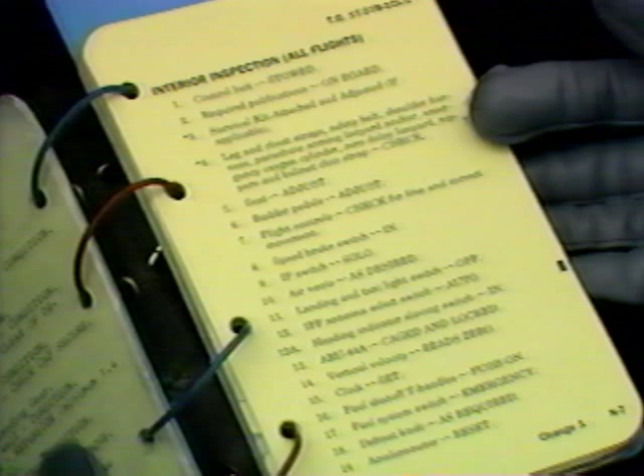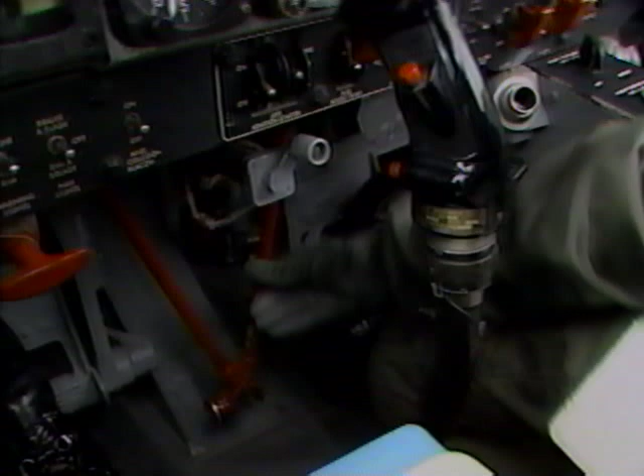This program will take you through the interior inspection, explaining how to accomplish the checks listed in your T-37 checklist. After you complete the exterior inspection, go ahead and strap in as you were taught in aviation physiology. Then get your checklist out so you can refer directly to it as you complete the check. The first item is control lock stowed. Swing it down and stow it as shown here. Make certain the control lock pin is secure in the locking bracket.

Next, you should ensure you brought the required pubs for your flight on board the aircraft. They should be stowed in the map compartment in the center console. Lock the door after checking them.

The third item directs you to check your survival kit. This is not normally used at pilot training bases, but if it is, the Dash 1 warns that it be connected to the parachute harness prior to fastening the lap belt, and the straps be routed under and not over or through the lap belt. Failure to properly route or tighten the straps could result in injury or seat-man-chute entanglement during ejection sequence.

A more commonly used survival kit is the PSK, Personal Survival Kit. When using a PSK, ensure that it is attached correctly prior to strapping in your parachute.

The next item directs you to check your leg and chest straps, safety belt, and shoulder harness to be sure you're strapped in properly, with zero delay and gold key connected. Your zippers should be closed, and make sure the emergency oxygen cylinder is connected. Check that your helmet chin strap is fastened and adjusted to snug fit under your chin.

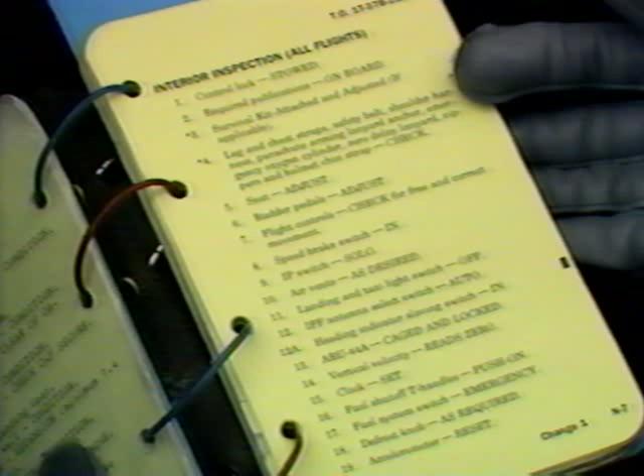Challenge your IP to also check these items listed in Step 4 of the checklist. Many IPs prefer that you wait until the battery is on to accomplish the challenge and response items, so you can use the interphone to talk.

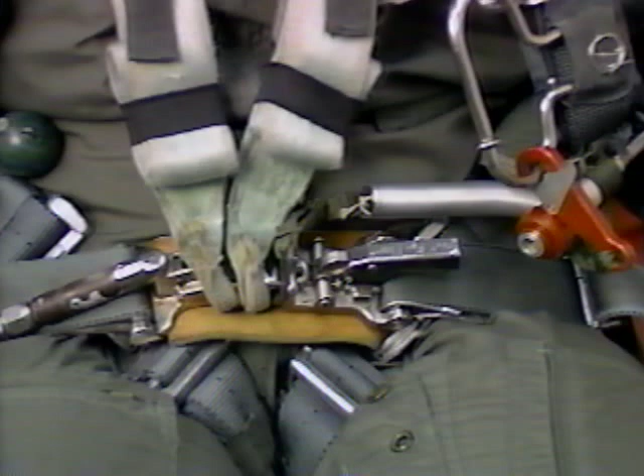At this point, there is a warning we need to address. Improper routing of personal leads may cause inadvertent opening of the safety belt latch during ejection. To permit clean separation from the seat during ejection, the parachute arming lanyard, commonly referred to as the gold key, must be outside the parachute harness and not caught on any equipment.

Also, you should connect, release, and reconnect the safety belt to ensure proper operation. Now check for positive locking of the belt by pulling up on the silver portion of the manual release handle without depressing the black portion of the handle.

Now you're ready to check for proper seat adjustment. Each time you fly, your position in the aircraft should be the same. Your instructor will give you references you can use to adjust your seat to the same height for each flight.

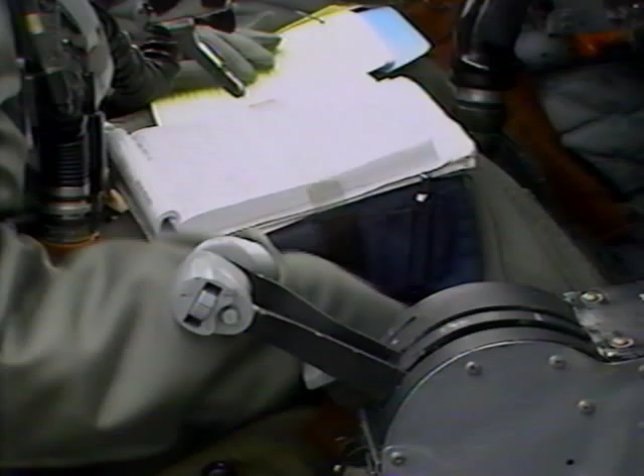To adjust the seat, first ensure that the hand grip safety pin is installed. Then check that the area underneath the seat is clear of obstructions. If an object was left under a hand grip, inadvertent movement could result when the seat is lowered.

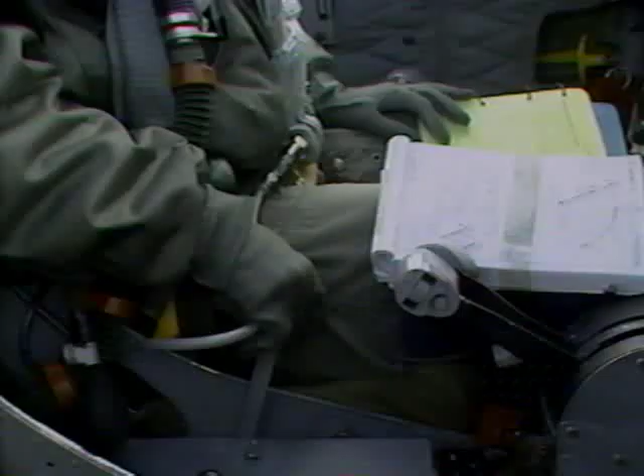To actually adjust the seat, lift up on this lever and allow the seat to move up and down on the rails by putting more or less weight on the seat. Use your legs to support your body weight in the seat, and then lower the lever when you're in the proper position.

Here's another warning. After adjusting the seat to the proper height, check that the seat catches are engaged. If the seat is not locked, G-loads in flight may cause it to move or prevent a safe ejection. Jiggle your seat up and down while simultaneously holding down on the adjustment lever to assure yourself it is locked in position. Next, adjust the rudder pedals.

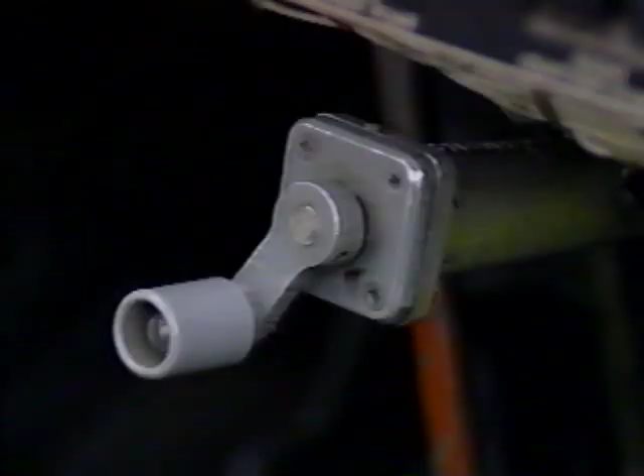When you rotate the rudder pedal crank, it causes the pedals to move closer or further away depending on which way you crank it. The rudder pedals should be in a position that will allow full rudder travel without having to completely extend your leg. With full rudder pedal travel, you should have a slight bend in your leg.

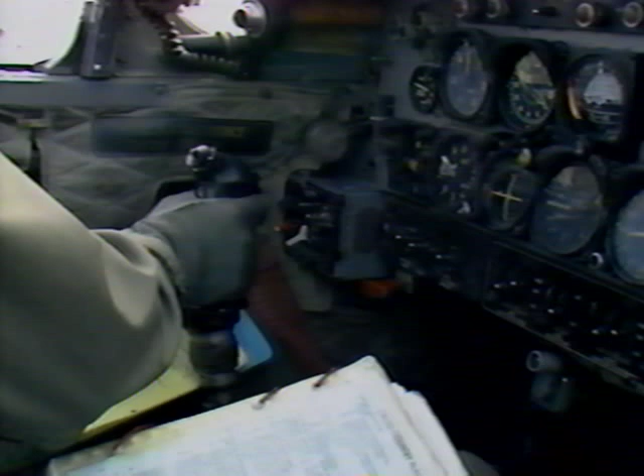Next, you'll check the flight controls. Be careful as you check the flight controls for free and proper movement, or you could bang the IP's knee with the stick. So before you begin moving the stick around, advise your instructor to keep their knees clear.

Push the stick to the left and check the left aileron. It should be up. Then check the right aileron. It should be down. Push the stick to the right. Check the right aileron. It should be up. The left aileron should be down.

Now pull the stick back and look over your left shoulder. The trailing edge of the horizontal stabilizer should come up with the control stick pulled back. If you can't see the trailing edge, check the position of the elevator horn on the outside of the horizontal stabilizer. It should be down. Finally, push the stick forward. The trailing edge should go down.

Next, while you're still looking back, check the rudder. Push the left rudder pedal. The trailing edge of the rudder will move toward your left. Push the right rudder pedal, and you will get the opposite effect on the rudder. Remember, it is extremely important to check the flight controls completely and thoroughly each time you fly.

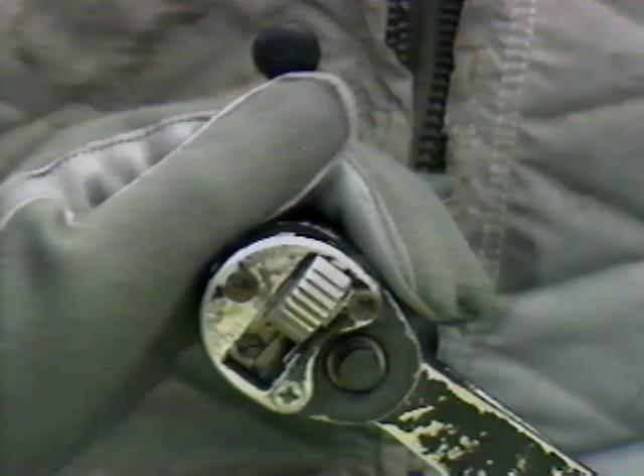Moving along in the checklist, the speed brake switch is next. Your speed brake switch should be in the in position for all ground operations. Next, check the IP speed brake. Reach over and check that it's in the solo position. This is a 3-position switch, and the solo position is in the center. With the IP switch in this position, you control the speed brake with the switch on your throttle.

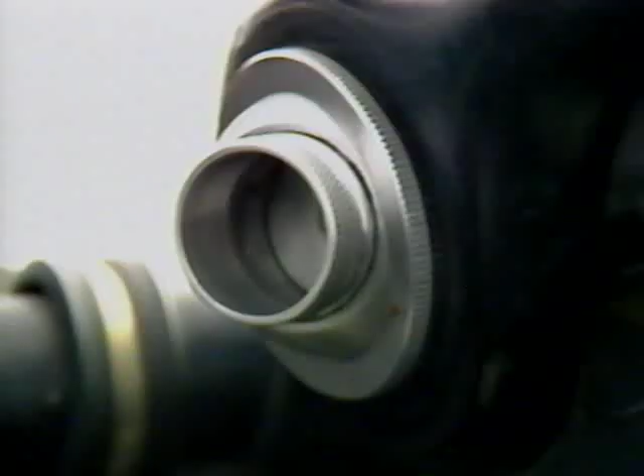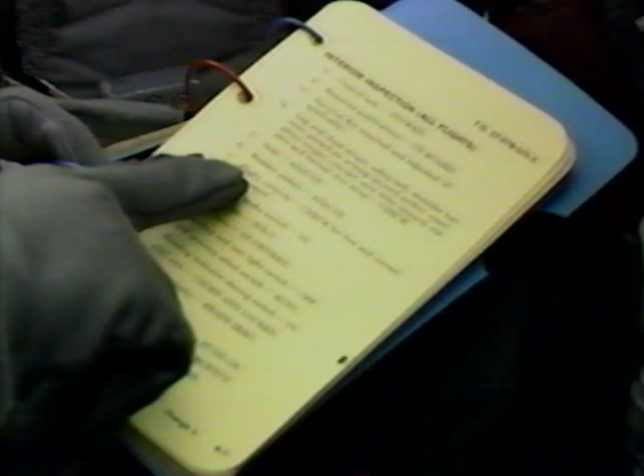Next, you will adjust 2 air vents. Just turn them to control the amount of airflow. Normally direct the vents at yourself for maximum comfort. However, during times of high humidity, you might get a stream of water blown on you. For those of you that like to accomplish several items at a time, this is a good point to stop and reference your checklist for accuracy. The next few items of your checklist take you across the instrument panel from left to right.

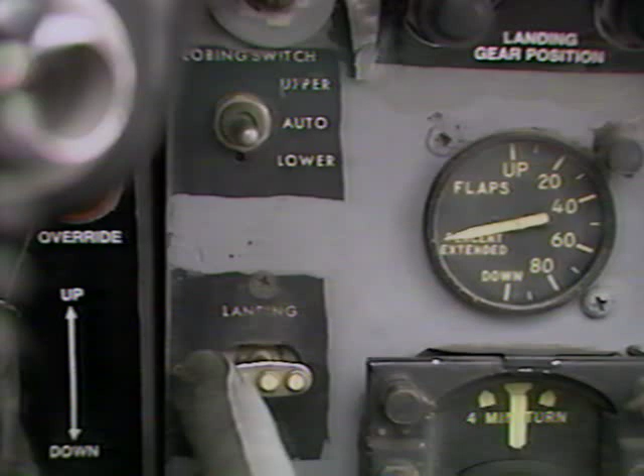Check the landing and taxi light switch off. The IFF antenna should be in the auto position. Just above the RMI is the heading indicator slaving switch. It has 3 positions: out, in, and fast. Check that it is in the in position. Ensure the ARU-44A attitude indicator is caged and locked.

Then come down to the vertical velocity indicator. Check that the VVI reads 0. If it doesn't, gently tap on the instrument to be sure it is not stuck. Set and wind the clock. Be careful not to overwind it.

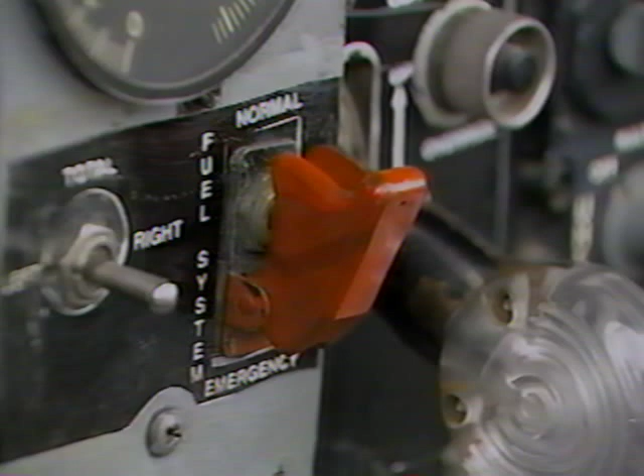Next, your checklist directs you to give a firm push on the fuel shutoff T-handles to ensure they are not pulled out. When they are in the out position, they are only out about half an inch, so it may be difficult to detect visually. The fuel system switch can be placed in emergency position by pulling the red guard away from the toggle switch and pushing down on the switch.

Next, check that the defrost knob is all the way in if you won't be needing it. To reset the accelerometer, just push the reset button in the lower left corner and it will return your accelerometer needle to 1G. Now check that the IFF, UHF, VOR, ILS, and DME are all off.

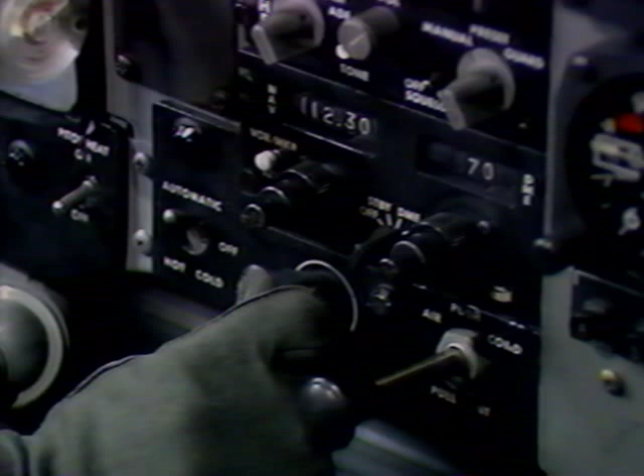There are 3 things you need to do with the air conditioner at this point. Pull the air lever out to vent position. Place the air temperature control switch to automatic, and finally set the temperature control rheostat as desired for your comfort.

Next, check the circuit breakers. From your position, there are several circuit breakers hidden by the airspeed and turn and slip indicators. You will need to reach over and physically confirm that these circuit breakers are in. The ARU-42A attitude indicator should be caged and locked.

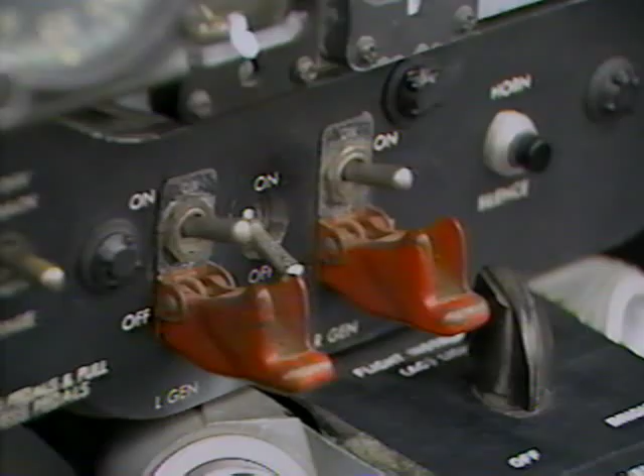Moving along to the next few items in the checklist, check the fuel boost pump switch off, the inverter switch off, and the generator switches on and the red switch guard closed. The pitot heat switch is next. It should be turned off.

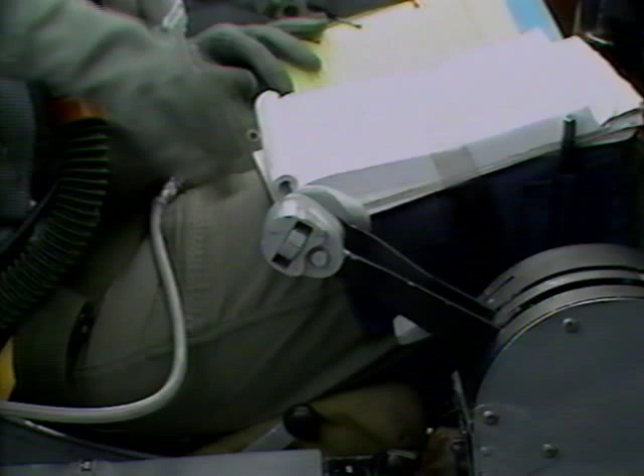Another warning that needs to be mentioned is that failure to accomplish this step can result in severe burns to the crew chief. Next on the checklist is check the throttles in cutoff. As a technique, lift up and pull back on your throttles to ensure they are in the cutoff position.

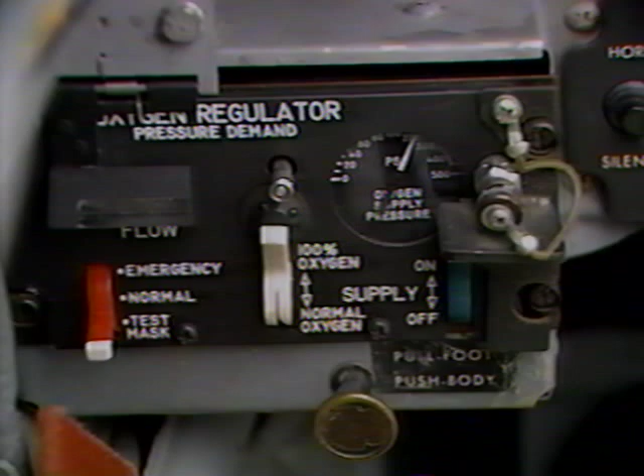Now you are ready to complete your oxygen system PRICE check. Hook up your mask and perform a pressure check on the oxygen regulator. First, you should select 100% oxygen with the diluter lever and place the emergency lever to the emergency position. Take a deep breath and hold it.

Then determine if there are any leaks in the mask or oxygen system. If your mask doesn't fit properly or is not tight enough, you'll feel oxygen escaping from around the edges. The blinker on the oxygen regulator will indicate if there is a flow. If you are holding your breath, it should not indicate any flow at all.

Now return the emergency lever to the normal setting and exhale to check the exhalation valve in your mask. Finally, with the diluter lever still in the 100% position, take a few short breaths and check the blinker for normal operation. Return the diluter lever to the normal position. Remember, the oxygen system check is a challenge and response item, so challenge your instructor.

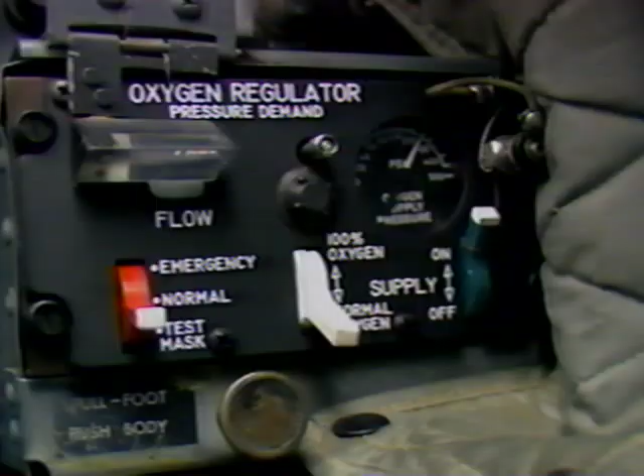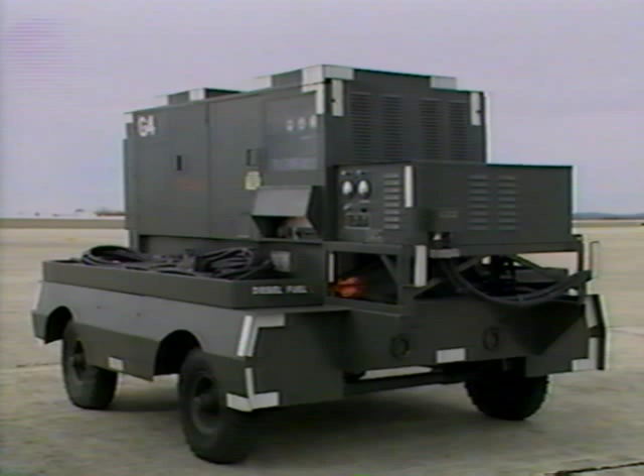Next, you will set up the interphone panel. Normally, the rotary switch is in the COM inner position with all the toggle switches outboard. Now you're ready to apply electrical power to the aircraft. Normally, your battery will provide sufficient power and should be placed on at this point if the APU is not used. If auxiliary power is used, the battery switch must be turned off or damage to the battery will result.

Moving on in the checklist, the pitot heat will be checked in coordination with the crew chief. This is accomplished by turning the pitot heat switch to the on position while the crew chief checks the heating system. They'll check the pitot tube and transducer vane on the left wing. When you receive a confirmation that the system checks OK, return the switch to the off position.

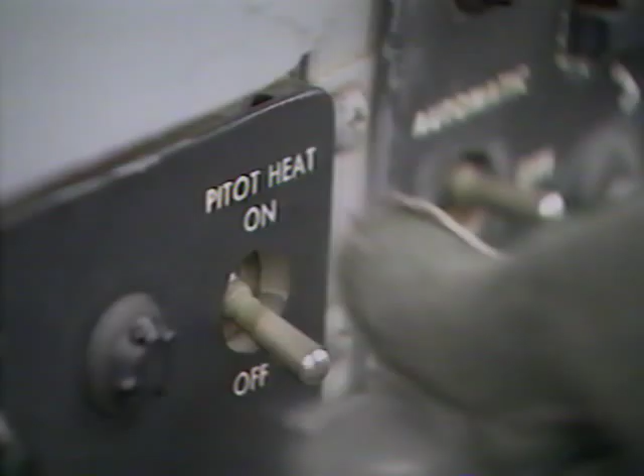The next item of your checklist directs you to check the inverter. Check that the main and spare inverters are working by first turning on the spare inverter and then the main. You can hear the spare inverter when it comes on, however you won't be able to hear the main. A later step in the checklist will require the inverter to be on for at least 1 minute. As a technique, hack the clock at this point in your interior checks. As a technique, look for movement in the fuel quantity gauge to confirm AC power is available. It may take 5 to 10 seconds before the pointer begins to move.

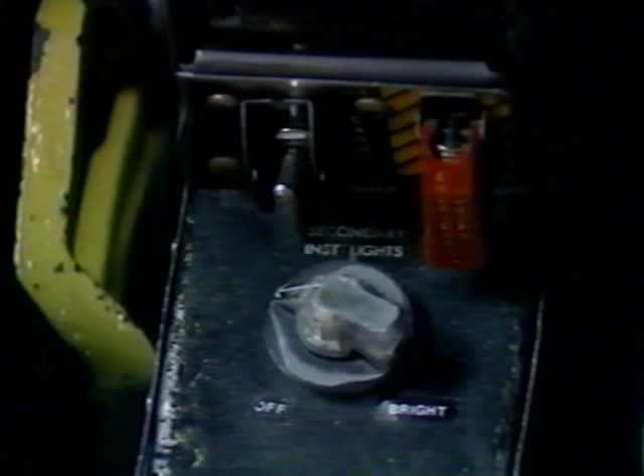The next item in the checklist directs you to set the interior lights as required. In the daytime, you normally don't use the interior lights, so turn them off. This is the radio lights rheostat. These two rheostats located on the center console control lighting for your primary instruments. The last rheostat is located on the rear portion of the center console and controls the intensity of floodlights located underneath the glare shield. Two lights that are often overlooked are the map lights. Be sure that yours is off and ask your instructor to check that theirs is off too.

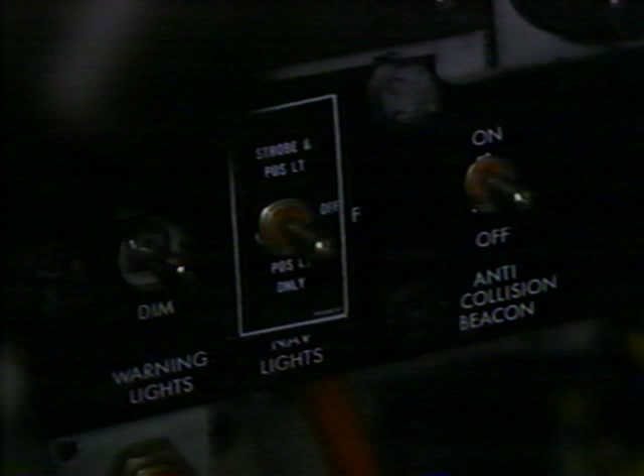Next, check the emergency canopy control switch. Located on the center console, it is safety wired closed. The next checklist item concerns the exterior lights. Prior to starting the engines, the position light switch must be set to the position light only, as required by Air Force Regulation 60-16. The anti-collision beacon switch should be off.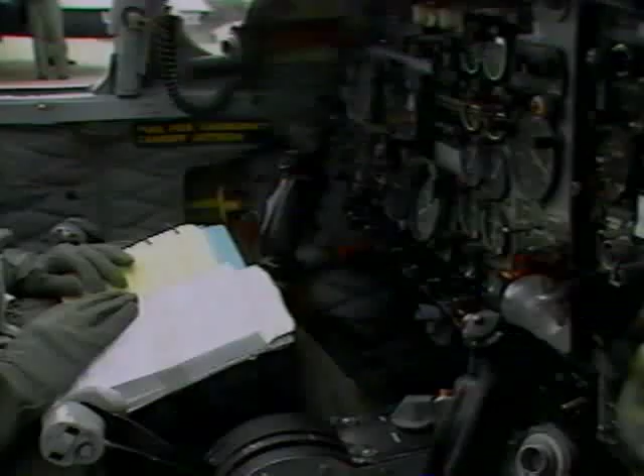Continuing on, reconfirm that both landing gear levers are down. Never pull up on the handles while the aircraft is on the ground. Push the landing gear warning lights test switch and check that the red warning light comes on in both gear handles. With the warning light switch depressed, place each throttle in idle one at a time. The gear warning horn should sound. Some IPs also like to check each throttle past the 70% region to ensure the warning horn goes out.

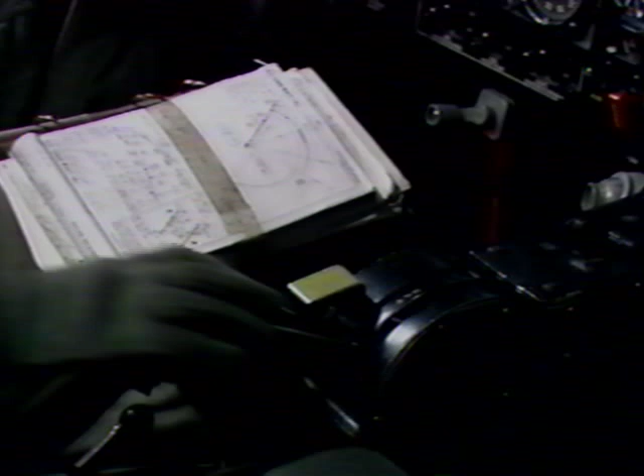Moving on, the landing gear position indicator lights are shown here. They should be on to indicate that all 3 gear are down and locked. Next on the checklist, the fuel boost pump warning light should be on since the boost pump switch is off.

Next, check the trim operation by actuating the trim button. The elevator trim is set for takeoff when the green light is on. Click the trim out of the green and then back again. Now look at your left aileron to see if the aileron trim tab is in the neutral position. You also need to check its operation.

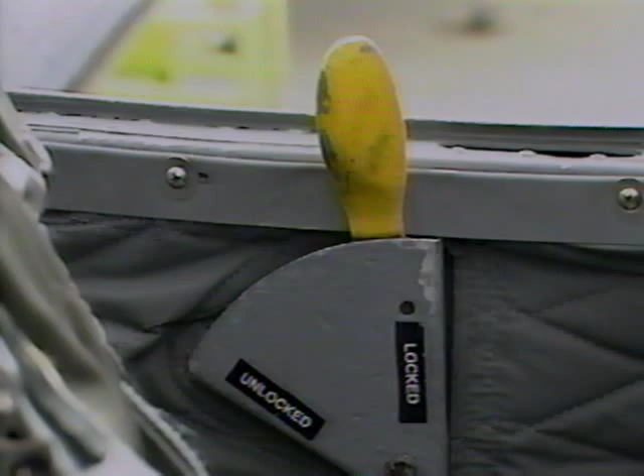Even though the canopy is up at this point, the canopy not locked warning light will be off because the canopy downlock handle is in the forward position. Make sure the canopy rails are clear and then move the downlock handle aft to the unlocked position. Check that the warning light illuminates. Motor the canopy down briefly with the internal canopy control switch to ensure proper operation of the canopy motor.

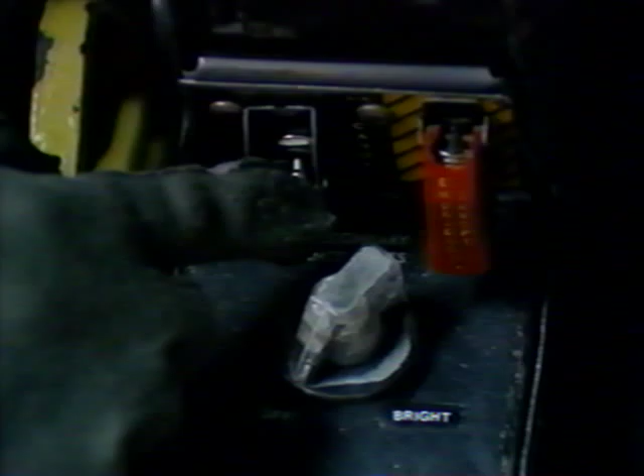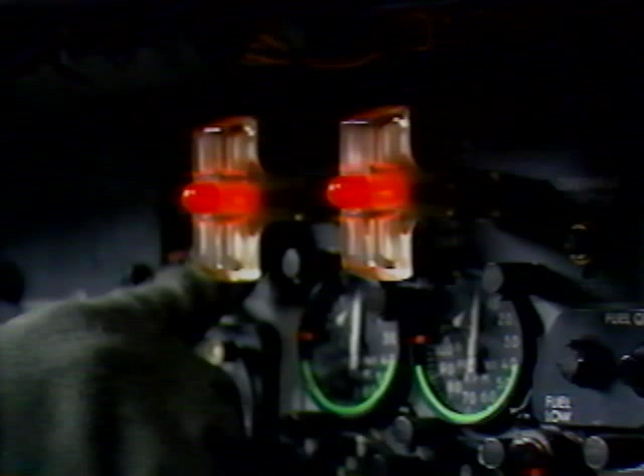Press the engine ice warning light to test the bulb. Next, test the fire detect system. The button on the left side of the T-handles tests the fire detect circuit. Press it and a steady red light should come on in each of the fuel shutoff T-handles. The button on the right side of the T-handles tests the engine overheat circuit. When you press it, the red lights blink on and off in each T-handle.

The fuel low-level warning light is next. Press to test the light as you did the others. Next, check to see if the gravity fuel light is on. It should be because the fuel system switch is in the emergency position. Drop down to the fuel quantity gauge to check the fuel quantity. Note that the fuel gauge has a 3-position toggle switch. The center position shown here allows the total fuel to be read from the gauge. Total fuel in the aircraft is 2,008.5 pounds. However, the fuel gauge will normally indicate only about 1,800 pounds of fuel.

Your primary attitude indicator is the ARU-44A. After 60 seconds of energizing, uncage the attitude indicator by pulling out and rotating the caging knob counterclockwise and then release it gently. Adjust the miniature aircraft to coincide with the horizon bar. Your standby attitude indicator is the ARU-42A. It should be uncaged and adjusted in the same manner as the ARU-44A.

Now you are ready to check the wing fuel balance. Manually position the switch either right or left and then release it. This allows the fuel quantity needle to wind down and register the level of fuel in the wing tank selected. Now check the other side. If there is a fuel imbalance between the wing tanks of more than 160 pounds, don't take the aircraft. Always reposition the toggle switch to the center position after a fuel quantity check. This will avoid misinterpretation of a low fuel state during subsequent fuel checks.

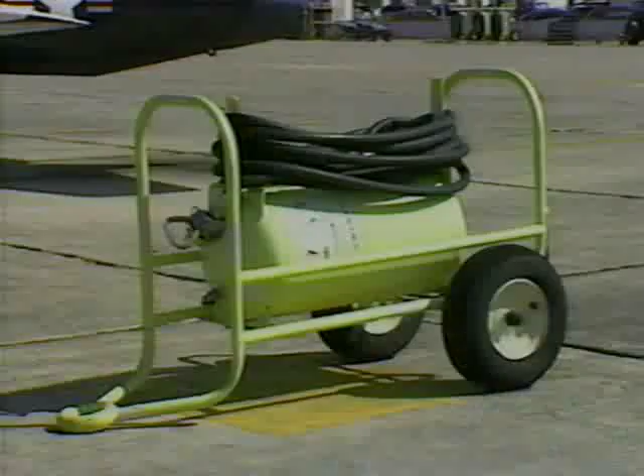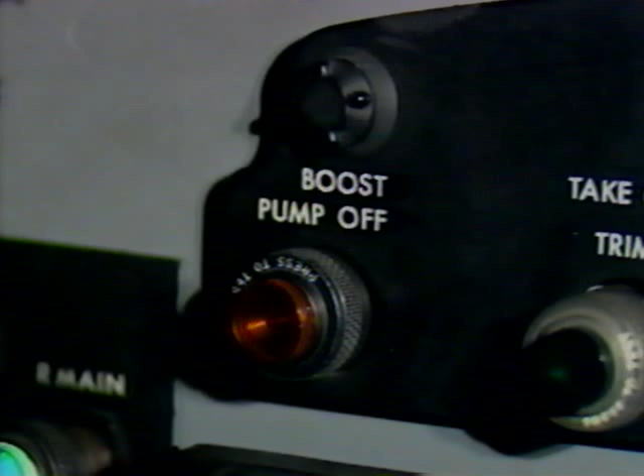Prior to starting the engines, you need to check for several things. Ensure a fire bottle is immediately available and ensure that refueling operations are not being conducted within 50 feet. Clear the engine intake, check for the crew chief, and signal for starting prior to engaging the starter switch. Place the fuel boost pump switch to the on position. If the boost pump light does not go off, abort the aircraft and note the discrepancy on the Form 781.

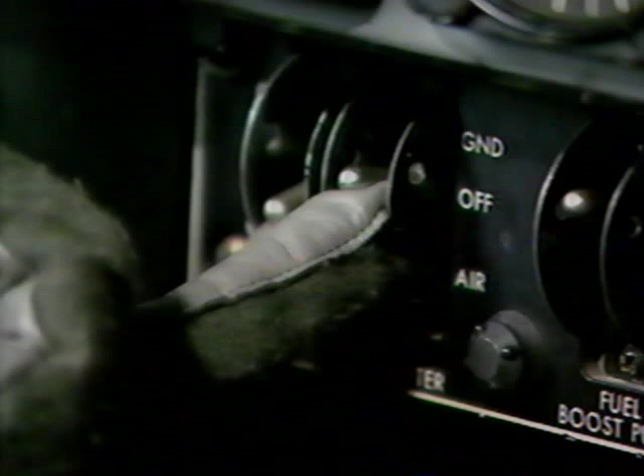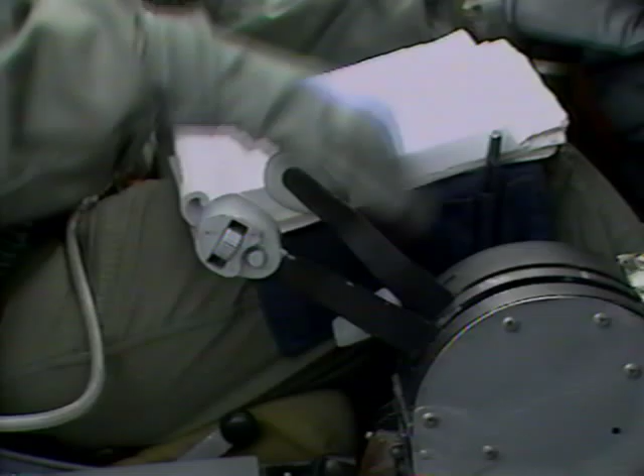First, let's start the left engine. Use your instructor's throttle for starting so that the cutoff feature is available if shutdown is necessary. Place the starter switch in the ground or up position. Next, at 5% RPM, place the ignition switch in the on position. At 8% RPM, move the left throttle forward past the cutoff detent to idle. Monitor the EGT gauge for temperature rise. Release the ignition switch at approximately 200 degrees and confirm that the switch returns to the off position. Release the starter switch when you see the RPM passing 25%.

During start, you must monitor both the EGT and RPM gauges for limitations. Additionally, you must be alert for other indications of abnormalities such as fire lights, smoke, or crew chief signals. The EGT normally peaks as RPM reaches idle RPM, 36 to 38%. The rates of RPM and EGT increase can be compared to see if a hot start will occur.

After the EGT peaks, check the engine instruments for the following indications. RPM should be in the 36 to 38% range. EGT should be in the 280 to 650 range. Fuel flow should be steady. Oil pressure steady within the 3 to 45 psi range. Hydraulic pressure should be 1250 to 1550 psi.

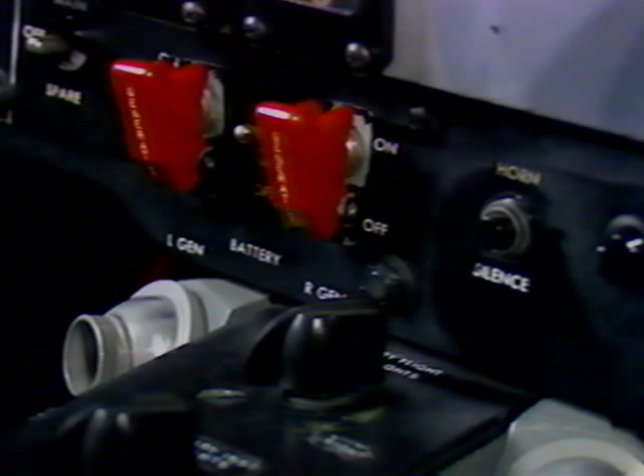If an APU was used for engine start, give the visual disconnect signal to the crew chief. Move the battery switch to the on position and note the jump on the left load meter if an APU was used during the start. The load meter should indicate a positive reading. If no positive reading exists, increase the RPM to a maximum of 60%. Remember, the generator cut-in speed is 38 to 42%.

If by 60% RPM the load meter does not indicate a positive reading, shut down the engine and write up the discrepancy in the Form 781. Move the left throttle to 60% and monitor for appropriate reading.

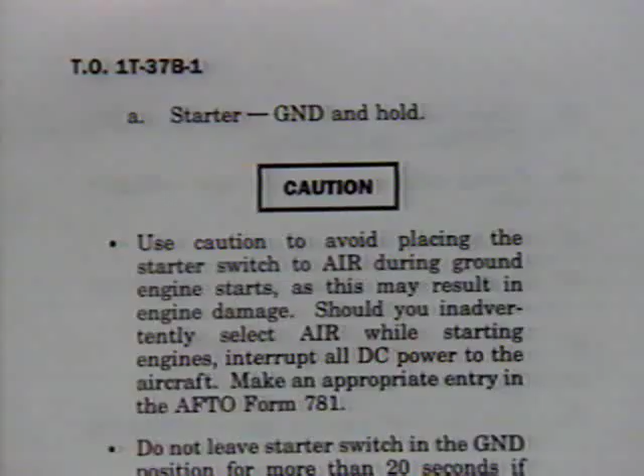The procedures for starting the right engine are the same as those for the left engine. After releasing the right engine starter switch at 25%, retard the left throttle to the idle position. The right engine instrument indications are the same as those specified for the left engine instruments immediately after start. Again, the right load meter should indicate a positive reading. If no positive reading exists, use the same procedures discussed earlier. Be sure you are familiar with the cautions associated with engine starts.

Once you are satisfied that the engines are operating properly, you're ready to continue with the before taxiing portion of your checklist. Open your checklist to the before taxiing check. First, return the fuel system switch to the normal position and ensure the gravity feed light goes out. Notice that the switch is covered in this position by the red switch guard. Now, place the IFF control switch to standby. Remember, the knob must be pulled out before it can be turned to standby.

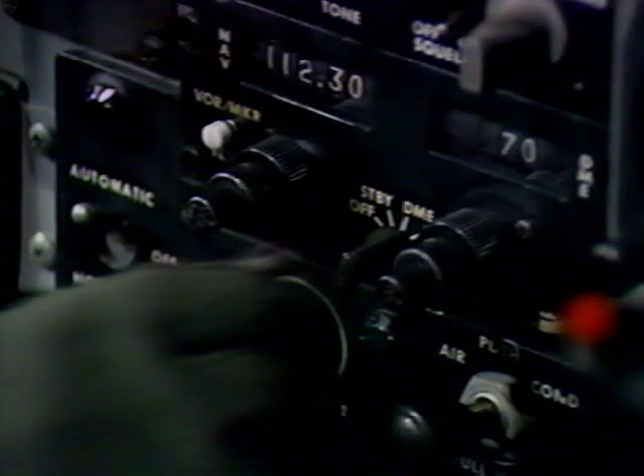Turn the UHF radio on by placing the control switch to both. To turn on the VOR ILS, turn the volume control knob to the right. Place the DME selector switch to standby to warm up the AVQ-75 model. There is no warm-up time required for the newer AN/ARN-154 DME. You can turn it on directly to the on position. Push the cockpit air lever into air condition.

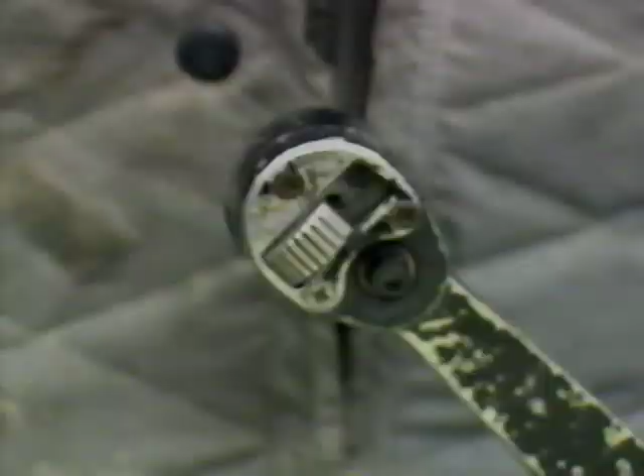Your next step is to check the operation of the speed brake and thrust attenuators. First, give the speed brake signal to the crew chief. The crew chief will clear the area around your speed brake and return the signal. Now place the speed brake switch to the out position. The crew chief will verify that the speed brake and both thrust attenuators have extended. Then return the switch to the in position.

In the cockpit, you can monitor the hydraulic pressure drop as the speed brake extends and retracts. Be sure the pressure returns to the normal operating range at the completion of both the extension and retraction cycles. The crew chief will give the OK signal if the speed brake and thrust attenuator operation was normal.

Next, the flap and spoiler operation check begins when you give the crew chief this signal. As with the speed brake, the crew chief will return the signal when he is ready for you to lower the flaps. Place the flap lever in the full down position. The crew chief will ensure both flaps and spoilers extend. Now return the flaps full up. Once again, the crew chief will make sure the flaps and the spoilers retract normally.

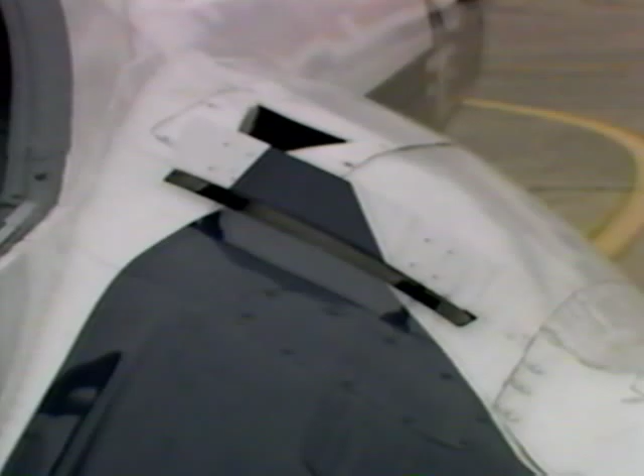Finally, place the flap lever to the 50% detent. Check the flap position indicator to verify the flaps are down 50%. It is also a good idea to visually check that you have a flap down, spoiler up, and confirm this with your IP. The crew chief will give this signal when he is sure the flaps and the spoilers are working properly. Next comes the VOR ILS check.

To use the self-test feature, first tune and identify a valid ILS or localizer frequency. The RMI bearing pointer should park at the 4 o'clock position with no off flags or to-from indication in the CDI. Also check for proper CDI deflection in relation to the aircraft position. Pressing the VOR ILS test button will illuminate the marker beacon light.

Now, tune and identify a valid VOR frequency. Set 315 in the course select window and press the VOR ILS test button and hold. If the system is working properly, several things should occur here. The CDI should center plus or minus 2 degrees. The marker beacon light will illuminate, and there should be a to indication in the to-from window, and the RMI bearing pointer should indicate 315 degrees. This completes the self-test of the VOR ILS system.

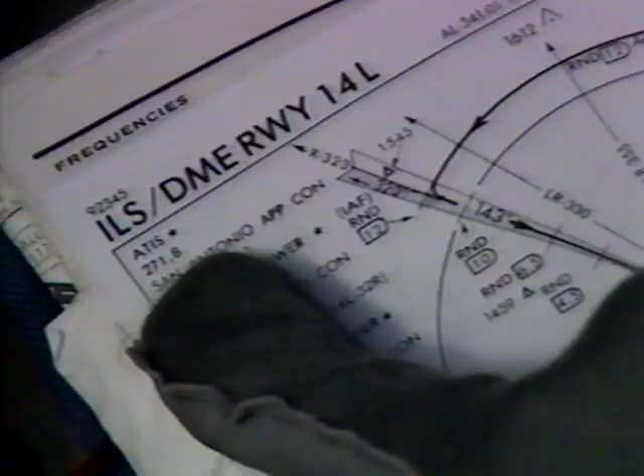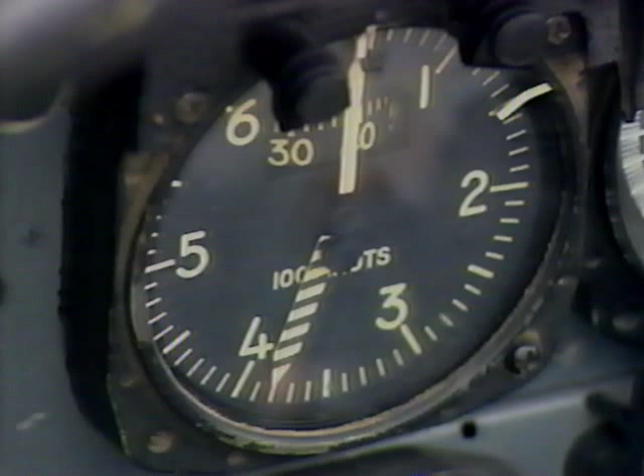Obtain the current altimeter setting from ATIS. If ATIS isn't available, the ground controller should give you the current altimeter setting when you request a taxi. Use the barometer set knob to adjust the altimeter. The indicated altitude should be plus or minus 75 feet of ramp elevation. The airspeed indicators should be between 30 and 40 knots indicated airspeed.

Now compare the headings on the RMI, J2, and magnetic compass. They should agree within plus or minus 5 degrees. Here the J2 and RMI compass is indicating 230 degrees, and the mag compass is indicating 228 degrees. Also make sure the magnetic compass is full of fluid and there are no cracks or bubbles.

The last of the flight instruments is the attitude indicator. Ensure both attitude indicators are set for level flight with no off flag showing.

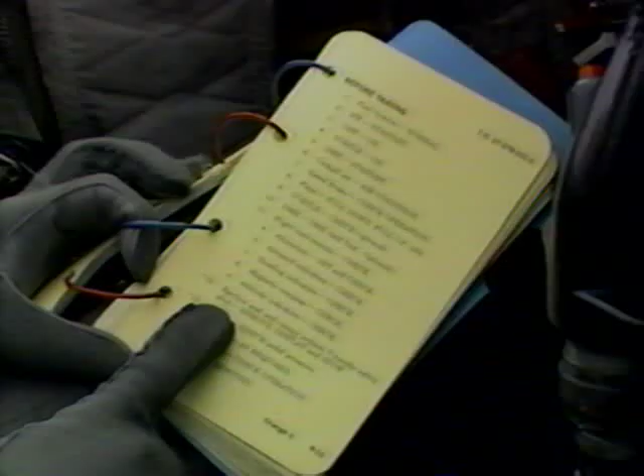The checklist now directs that you remove, display, and stow the ejection seat and canopy safety pins. To remove the seat pin, first place your left hand palm down on top of the left hand grip to guard it down. Then reach down with your right hand and remove the pin. Guard the left hand grip until the red streamer has cleared the seat. Now reach over and carefully remove the canopy safety pin and then display both pins to the crew chief. Stow your pins and challenge your IP to show and stow their pin also.

Now check the brakes for sufficient pedal pressure by smoothly applying pressure to the top of the pedal. Challenge your IP to do the same and make sure you get the proper response. Position your taxi light as required, normally to the taxi position.

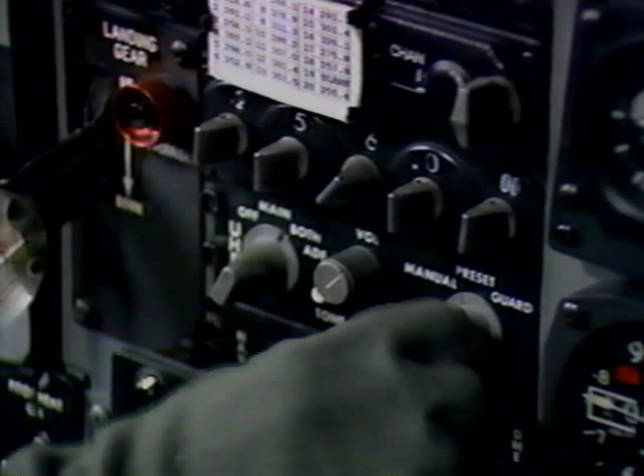Now it is time to check the operation of your UHF radio. First, dial in the ground control frequency or use the preset frequency. Then call for taxi instructions using the procedures at your base. A response to your call by ground control indicates that your radio is working properly.

Ground, Curly 29, taxi with Kilo. Curly 29, ground, taxi to runway 22 right.

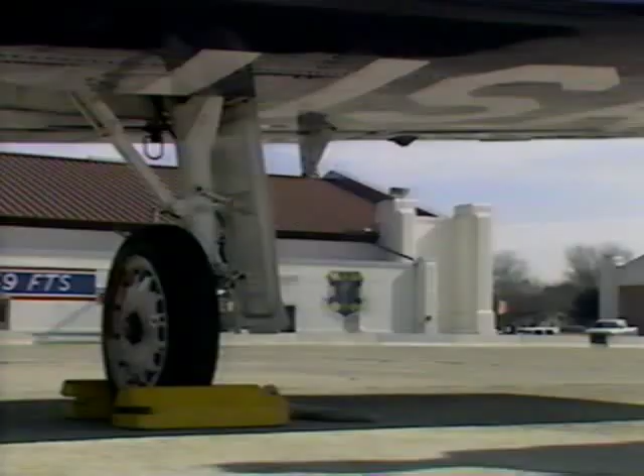Then confirm with your instructor that their hands are clear of all controls and give the crew chief the signal to remove the chocks and you're ready to taxi. This completes the before taxi check. Next, we'll cover the taxi and before takeoff checks.

Once safely clear of other aircraft, you can start the taxi check. Begin by checking the turn and slip indicator. The turn needle should indicate proper direction and the ball should have free movement in the glass tube. The heading indicator should also reflect correct movement and heading.

Next, we move into the before takeoff check. Before checking the flight controls, ensure feet and knees are clear and that you disengage the nose wheel steering. You're checking for binding in flight controls. The next couple of items are challenge and response items. Visually check that your zero delay and parachute arming lanyard are connected. Also ensure that your helmet visor is in the proper position.

All aircrew members must use a visor from takeoff through the 10,000 foot check and after the descent check if sufficient light is available to permit proper vision. The checklist now directs you to review the TOLD data, which you should have copied from the sign-out area prior to stepping. Next, we turn on the anti-collision beacon and the strobe and position lights.

The defroster and cockpit temperature are next. They should be set as required. Next, the pitot heat is turned on. The VOR, ILS, and DME should be checked at this time if it wasn't already done in the before taxi check.

The last item in the before takeoff check is to close and lock the canopy. Ensure that you check that the canopy rail is free of obstruction and notify your instructor. Wait for confirmation that it is clear before lowering the canopy.

Once you have been cleared for takeoff, make sure the runway and final are clear of other aircraft and taxi into position on the runway and accomplish the lineup check. Initially, you will practice static takeoffs. Later, you and your IP will have the option of a rolling takeoff.

Pump up the brakes and glance outside for creeping of the aircraft as you check the lineup items in the checklist. The first item is to set the IFF as required. You next check both attitude indicators for accuracy. Pushing the throttles up to military is the third step of the lineup check. Ensure the EGT doesn't exceed limitations and then continue with the remaining engine instruments.

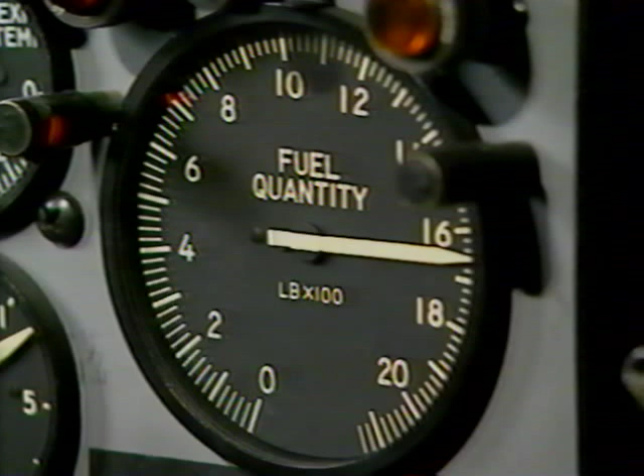If the total fuel is significantly less than 1,650 pounds, fuel is not flowing from the wings. Switch the fuel system to emergency and refer to your -1 for further procedures. As you're doing your in-flight checks, remember you must continue to clear for other aircraft, birds, and other hazards. A common problem you need to avoid is burying your head in the cockpit while doing a check. You've got to clear throughout each step of the checklist with only short glances inside.

Continuing on with the operations check, the next two steps are challenge and response items. If your flight will exceed 10,000 feet for a prolonged period, disconnect and stow your zero delay lanyard. Next, check for proper operation of your oxygen system. As you reach for the emergency lever, make sure your hand goes in front of the throttles. Otherwise, your glove or sleeve could get caught on the canopy jettison T-handle.

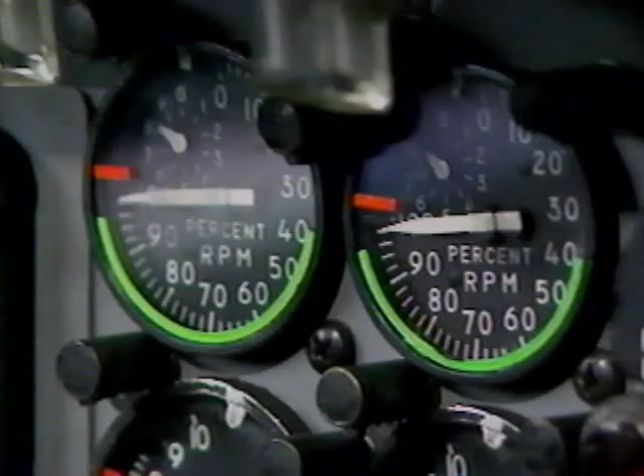Last on the operations check is a check of the instruments. The engine, hydraulic, and load meters should be checked routinely throughout your sortie to ensure compliance with -1 limitations. Upon reaching your final cruise or maneuvering altitude, get the jet trimmed up and run through the operations check. Continue to run this check approximately every 15 minutes thereafter.

The next check you'll do is the descent check. Normally, this portion of your flight is very busy, so you want to accomplish as much of this check as possible before you start your descent or leave your area. First, check your heading and attitude systems. Cross-check the RMI and J2 against the magnetic compass. They should agree ±5 degrees. If they don't, you need to actuate the fast slave cycle.

During the fast slave cycle, you need to maintain a constant airspeed and heading for 3 minutes. If a turn becomes necessary, move the slaving switch to the out position, make a gentle turn and return the slaving switch to the center position at the completion of the turn. Check your attitude indicators to ensure both instruments indicate the proper flight attitude. If flight conditions are VMC and the attitude indicators aren't properly aligned, you may want to cage and adjust them or simply adjust the miniature aircraft for level flight.

Now check the defroster and cockpit temperature are set as required. Use the defrost to preheat the windscreen if you've been cruising at high altitudes for an extended period of time, or if you will be making a rapid descent. This should keep the canopy from fogging up. The fuel quantity will be the next item you'll check. As you did with the operations check, check the total fuel, wing tank balance, and tank quantity.

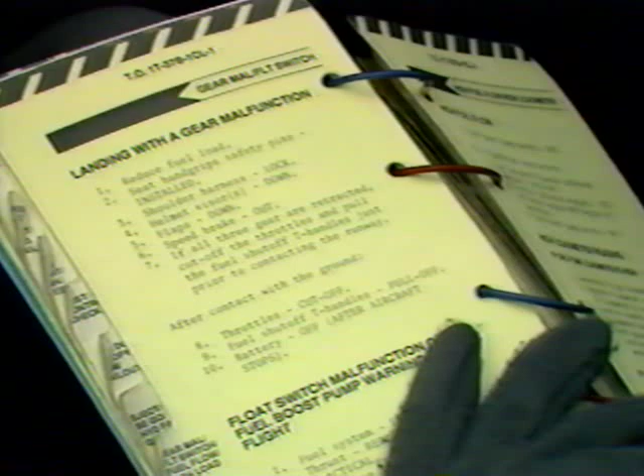Continuing with the descent check, you'll check the hydraulic gauge for the correct pressure. If your aircraft has suffered a loss of hydraulic pressure, it is better to know about it now and take the appropriate actions rather than to discover a hydraulic loss after you've lowered the gear handle in the before landing check. The last three steps of the descent check are challenge and response.

First, you'll need to connect your zero delay lanyard prior to the initial approach fix for penetration descent or prior to 10,000 feet pressure altitude during en route descent and challenge your IP. Next, set the current altimeter setting. It can be attained from ATIS or the local controlling agency. Challenge your IP to confirm their altimeter setting is also set.

Lastly, ensure that your helmet visor is in the proper position. All aircrew members will use a visor from takeoff through the 10,000 foot check and after the descent check if sufficient light is available to permit proper vision.

The next check you'll do is the before landing check. This check will keep you from landing with the wrong configuration. Always perform a before landing check to confirm you've properly configured the aircraft. Remember, since this check is normally done during critical phases of flight, you'll have to commit it to memory. First, make sure the speed brake switch is set as required for the type approach and landing you're flying.

Next, lower the gear when below 150 knots. Confirm the gear are down and locked. You should have 3 green, no red light in the handle, and no gear warning horn. It is also a good idea to check your hydraulic pressure for a normal indication. Now challenge your instructor to confirm the gear are in the down position. This is one check you can't afford to forget.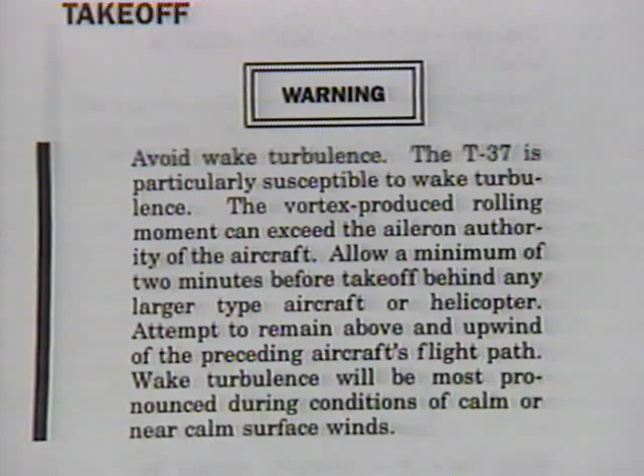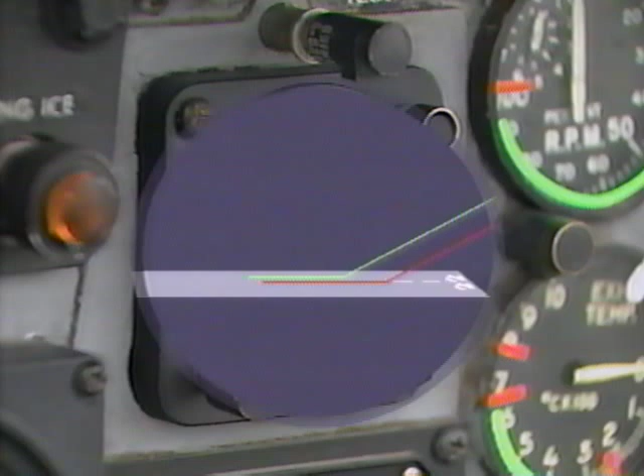The T-37 is particularly susceptible to it. The vortex-produced rolling moment can exceed the aileron authority of the aircraft. Allow a minimum of 2 minutes before takeoff behind any larger type aircraft or helicopter and a minimum of 3 minutes behind any aircraft designated as a heavy in FLIP General Planning. Attempt to remain above and upwind of the preceding aircraft's flight path. Last, keep in mind that wake turbulence will be most pronounced during conditions of calm or near calm surface winds.

The last in-flight check is another one you'll have to commit to memory. You'll perform this check when you make the decision to go around or execute a missed approach. As soon as you make your decision, advance the throttles to military and ensure the speed brake switch is in. If the go-around decision was made very near the runway, touchdown may be unavoidable. Do not try and hold the aircraft off the runway.

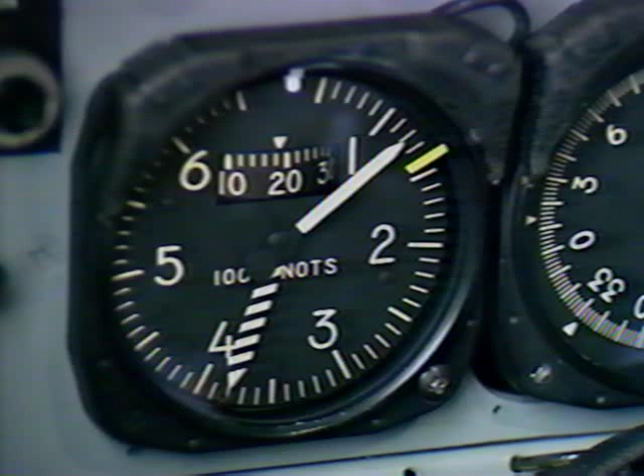If you do happen to touch down, lower the nose slightly to help accelerate to takeoff airspeed. Then establish the takeoff attitude and allow the aircraft to fly off the runway. When you're sure you'll remain airborne, have confirmed that you're climbing and have a minimum of 100 knots, raise the gear. Don't forget to check your landing lights at this point also. At 110 knots minimum, raise the flaps. Continue monitoring gear and flap retraction for normal indications. Now do a quick check of your engine instruments for normal indications.

It's easy to get task saturated when working in the overhead pattern. However, it's important that you not forget to accomplish an operations check approximately every 15 minutes. You can establish a good habit pattern of running an operations check every time you go around the outside downwind. There's plenty of time to run this check, but you must remember to continue clearing on the radios and outside your aircraft for other overhead traffic.

To make a touch-and-go landing, perform the desired approach and landing, then perform normal go-around procedures. However, a word of warning, touch-and-go landings encompass all aspects of landing and takeoff procedures in a relatively short time span. Be consistently alert for possible aircraft malfunction during these two critical phases of flight.

Post-flight checks are the last of many checklist procedures you'll perform on each flight. The checks normally begin as you clear the runway onto the taxiway. After clearing the runway, comply with local directives to accomplish the after landing check. The first item of the after landing check directs you to confirm all your cockpit loose items are secured prior to opening the canopy and challenging your instructor for a response. Items such as navigation maps, pencils, checklists, and in-flight guides can fly out of the cockpit and into an engine if not properly stowed.

Next, bring the aircraft to a complete stop or give control of the aircraft to your instructor as you install the seat and canopy jettison T-handle safety pins. Take care to install the jettison pin correctly. Is this pin being installed correctly? Yes, the straight portion of the pin is in the hole just forward of the T-handle and will safety the jettison system. Do not move the canopy jettison T-handle in an effort to insert the pin.

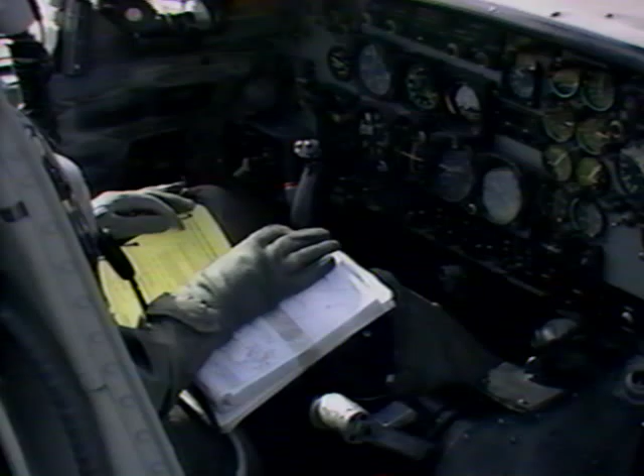Install your seat pin and ask your instructor to install his also. Do not move the hand grips to insert the pin. This could result in you inadvertently arming the ejection system. Ensure your instructor responds to your challenge. Next, check to ensure the speed brake switch is in the in position.

This is the only item of the after landing check that can be accomplished on the landing roll. If you retracted the speed brake during the rollout, this would be a double check to ensure that it is up. Now direct your efforts to the right side of the cockpit. The IFF is no longer needed and should be turned off at this time. The VOR, ILS, and DME should also be placed in the off position.

Moving across the bottom of the instrument panel, turn the pitot heat switch off so that the tube will be cooled by the time you reach the parking area. Next, set the landing lights according to local directives, generally to either taxi or off. Moving down from the landing lights, set the anti-collision beacons as required. Generally, place the switch to the off position. The position lights should be set to position lights only.

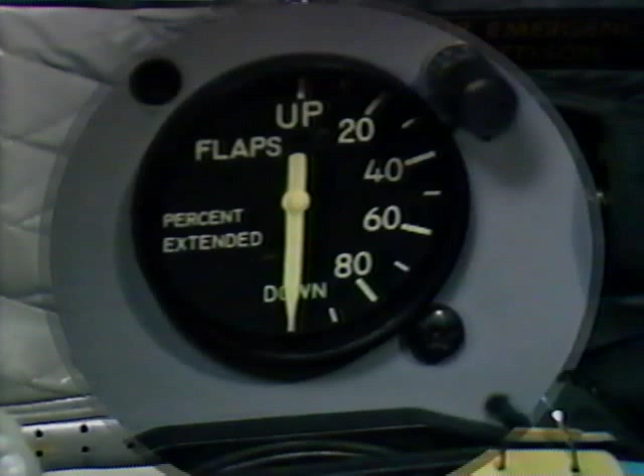Next, place the flap handle in the up position as directed by the last item in the after landing check. To ensure the flaps are retracting, check the flap indicator. As you taxi back to the chocks, you may want to check with your IP and shut down the ramp side engine. Prior to shutting down the engine, move the fuel system switch to emergency and check the EGT is stable. This ramp side engine shutdown procedure is often used for noise abatement. It also helps to slow down your taxi speed and reduce wear on the brakes.

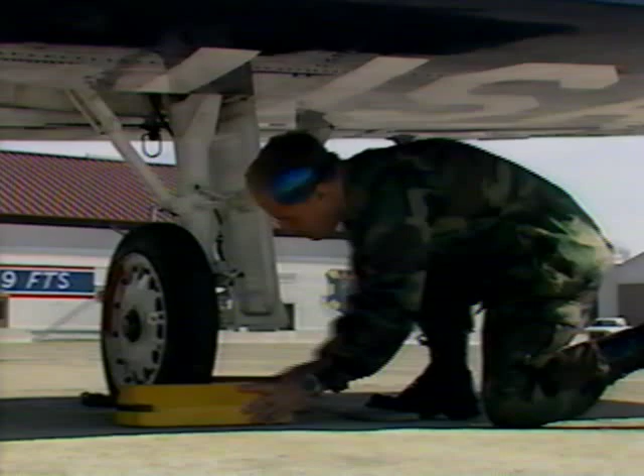If an engine is shut down, check the hydraulic pressure. If you lose hydraulic pressure, stop the aircraft, shut down the other engine, and call for a tug and pins. If your hydraulic pressure is good, continue to the parking area. After you've stopped the aircraft, continue holding the brakes until the wheel chocks are installed. Now proceed with your engine shutdown checks.

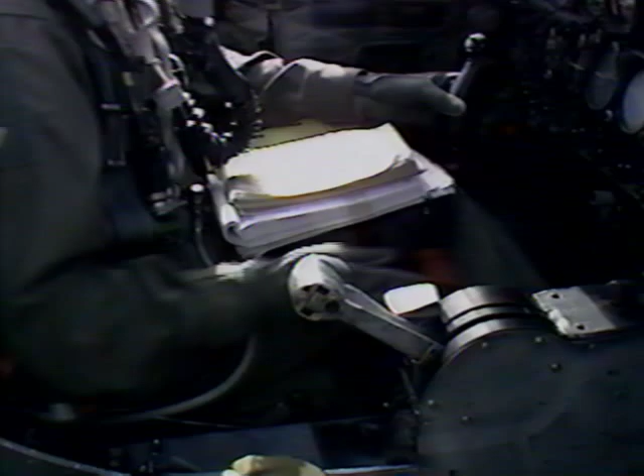Next, install the seat and canopy jettison T-handle safety pins if not previously installed. Don't forget to challenge your IP on this item. Moving on with the next engine shutdown item, make sure the canopy rail is clear and move the downlock handle forward to the locked position. Coming back to the instrument panel, turn the radio off. The interior and exterior lights are next. They can be turned off at this time. Normally the position lights and taxi light will be the only exterior lights on at this time. If you've used any interior lights, now is the time to turn them off.

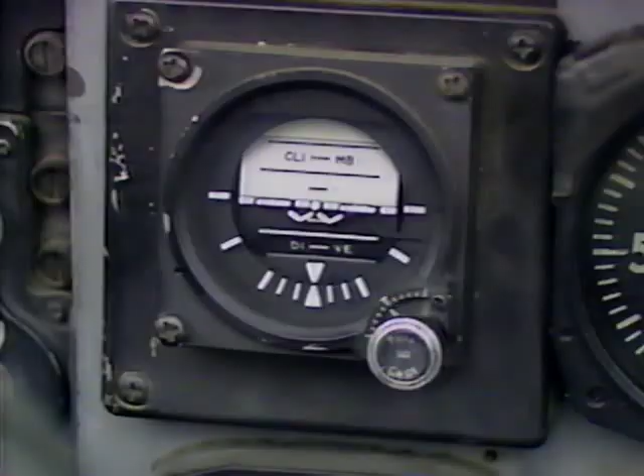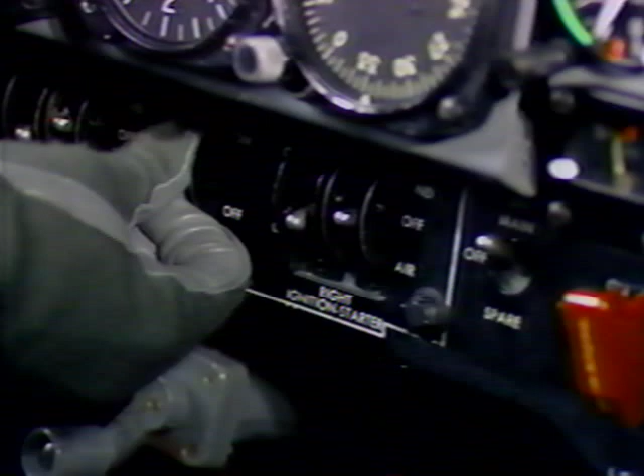Now reach up and cage and lock your attitude indicator. Ensure your IP does the same. Next, click the trim to the neutral position. You'll normally have to click the trim forward following a landing. The next two items to be turned off are the fuel boost pump and the inverter. The next item up is a challenge and response. Place the oxygen diluter lever in the 100% position to prevent the system from becoming contaminated while the aircraft is on the ground. Moving down to complete the last few items of the engine shutdown checklist, ensure the rudder pedals are neutral, then place the control lock into the position to lock the flight controls.

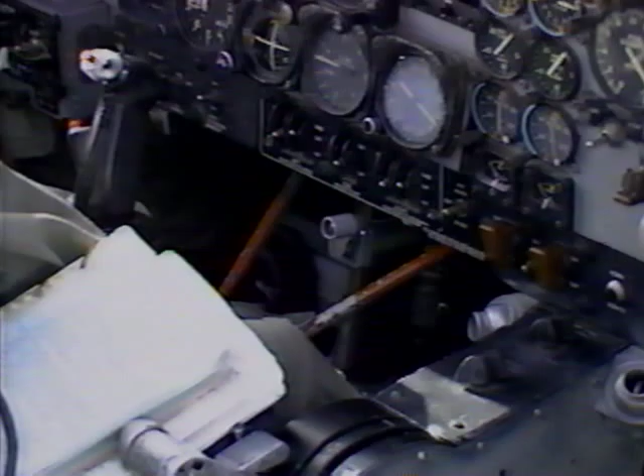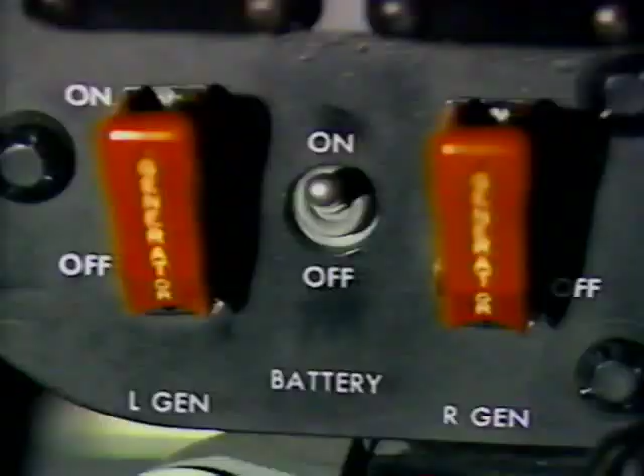Next, check that the crew chief has placed the wheel chocks around the main gear. Before you stand to leave the aircraft, make sure your gold key is secured on your parachute harness. Inadvertent deployment of your chute would ruin your whole day. Lastly, turn the battery off. There are a few items you should check before walking off. Check that the gear safety pins, grounding wire, and pitot tube cover are properly installed.

One last warning as you leave the aircraft. Stand clear of tailpipes after engine shutdown and at all times when vapors exit from tailpipes. Danger to personnel exists because of explosive qualities of fuel vapors. You are now ready to do some paperwork. Your student workbook explains how to properly fill out the 781, so it will not be covered in this program.

At this point, your responsibility for the aircraft is transferred and you may now leave the aircraft to the ground crew. Throughout your Air Force career, no matter what you fly, you'll be using in-flight checks that will help you safely accomplish the mission. Take the time now to develop proper checklist discipline and fly safe.